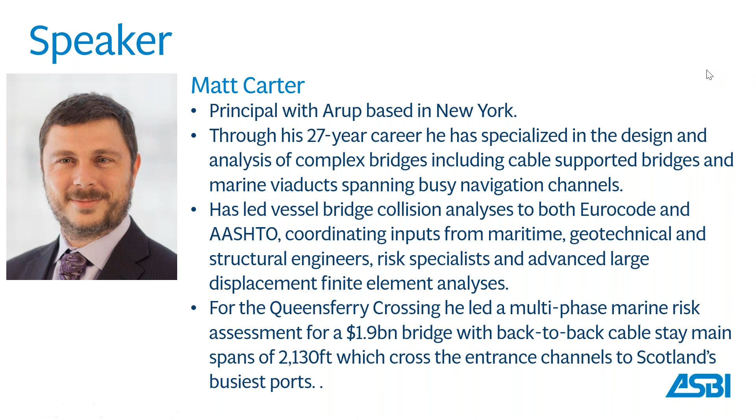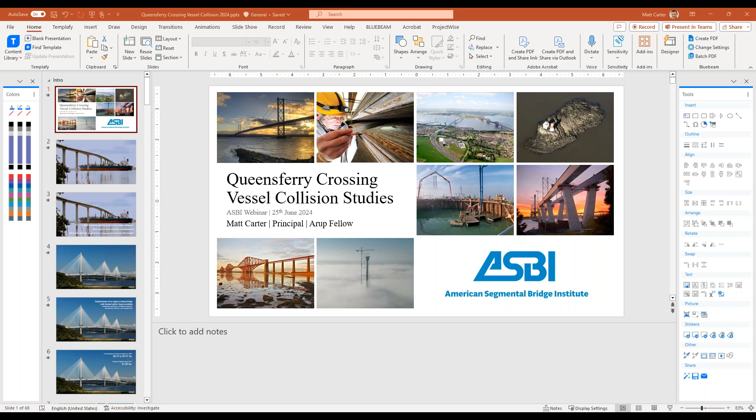Thanks, Greg. Let me just make sure I get it. Yeah, you just need to start the presentation. Great, there it is. All right, can you hear me? Yep, we can hear you just fine. So I will go on mute and turn it over to you.

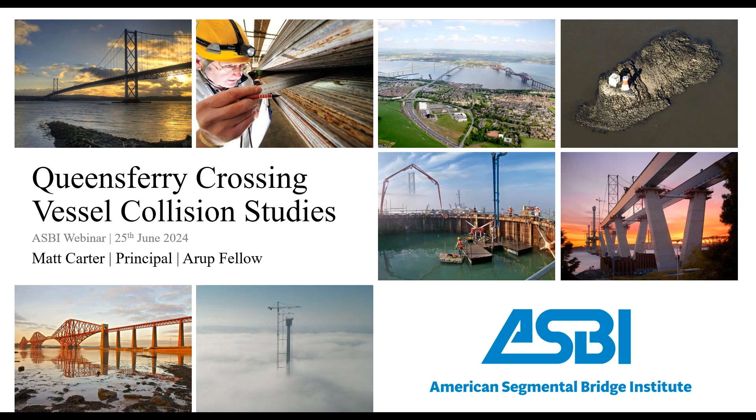All right, well look, thank you for that introduction, and thanks everyone for coming today. Many segmental bridges cross navigable waterways, so vessel collision risk, I think, is of interest to designers of segmental bridges, and especially at the moment where this risk is in the spotlight.

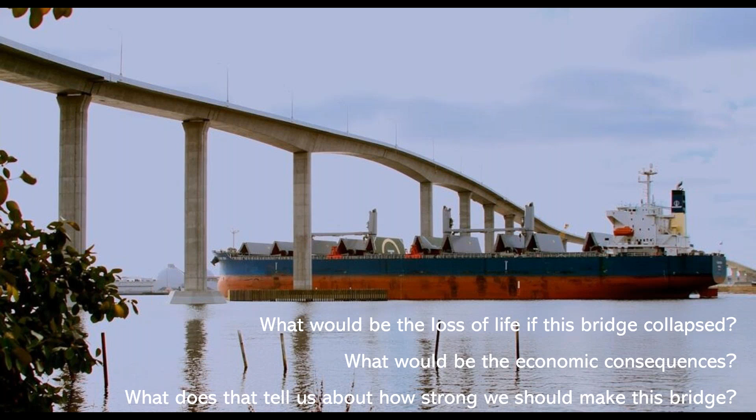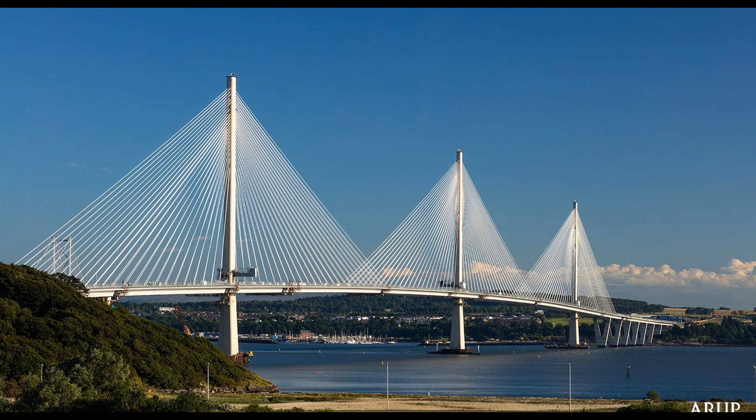If you're designing a bridge like this, there are some questions that you might reasonably ask yourself, like what would be the loss of life if this bridge collapsed? What would be the economic consequences? And what does that tell us about how strong we should make this bridge? These are all questions that we had to address in the design of the Queensferry Crossing.

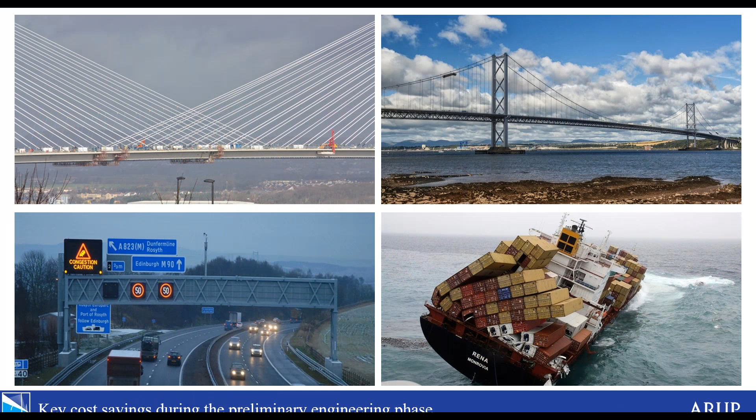It is an international case study, but it shares a lot in common with many major bridge projects in the United States. And it's an incredible value story as well. It's an award-winning structure which was delivered for about a third of the originally estimated cost, still achieving all of the client's strategic goals. A lot of the cost savings came from engineering during the preliminary engineering phase, good decisions that were made, and the client invested in giving the time and budget to allow these decisions to be investigated and made.

And there's four that I often think about. There's the unique crossing cables structural system. There was a managed crossing strategy that found a sustainable use of the existing road bridge. There was the use of intelligent mobility to make the roads work smarter and have less physical infrastructure. And then the topic of today, the marine risk assessment.

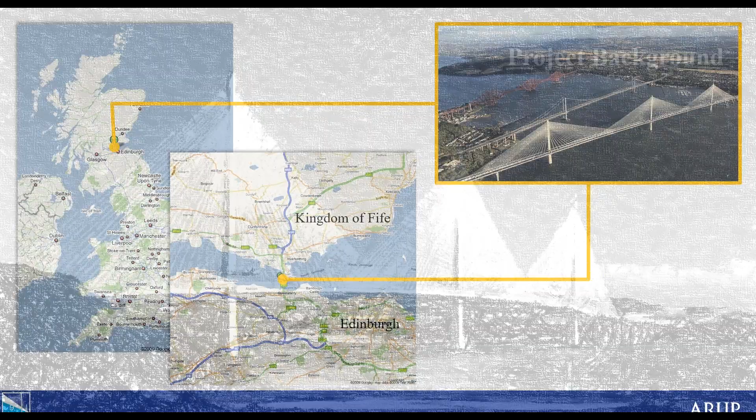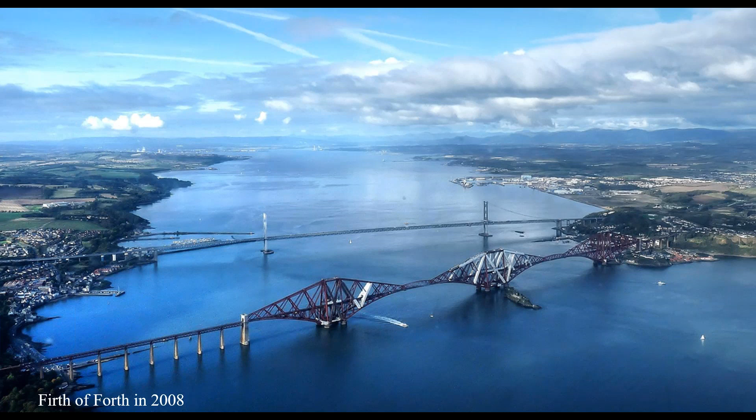Just a bit of background on the project. The Queensferry Crossing is in Scotland. It connects the capital of Scotland, Edinburgh, to the Kingdom of Fife, which is one of the main commuting districts. It crosses the Firth of Forth. The Firth is the Scottish word for estuary, and this is what the Firth of Forth looked like at the beginning of the project in 2008, with two historic bridges already crossing there.

There's the 19th century rail bridge, which is a very famous heritage structure, and then the 20th century road bridge opened in 1964.

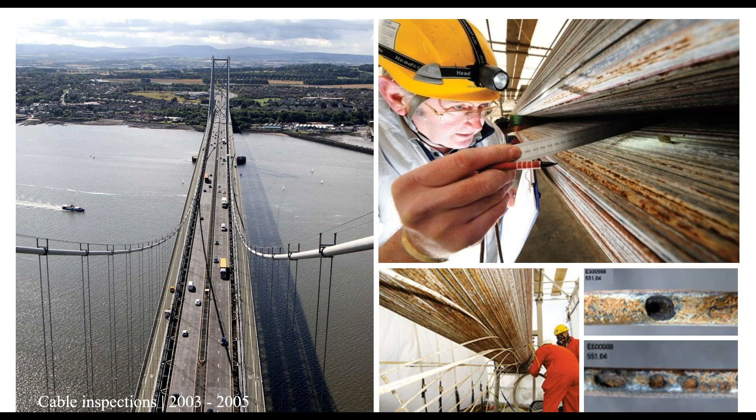It was Britain's first major suspension bridge, carrying 66,000 vehicles a day, more than double the traffic volume it was originally designed for. The story starts back in 2003 when the bridge master for the Forth Road Bridge, hearing about what was going on in the United States when cables were being unwrapped and inspected, took the decision to take a look inside the Forth Bridge cables and found a pretty bad picture: a lot of corrosion, a lot of wire breaks, and a prognosis that the bridge could not go on indefinitely, and something needed to be done.

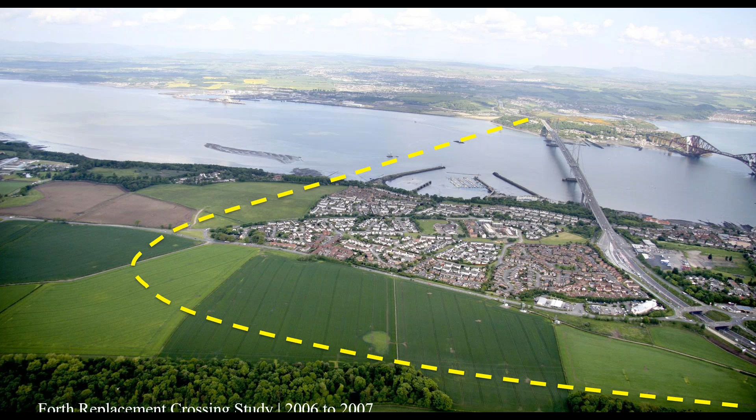This was combined with other maintenance issues related to the very high volumes of truck traffic on the bridge. That led to feasibility studies in 2006 and 2007, which looked at no-build options, tunnels, and bridges on a variety of alignments, eventually concluding there should be a replacement bridge on an alignment slightly to the west of the existing bridge. It's a very special alignment because it crosses right over Beamer Rock, a dolerite outcrop in the middle of the Firth of Forth.

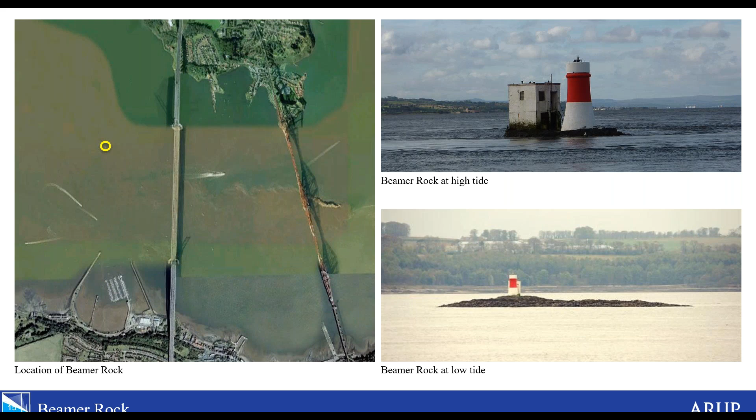It's a tiny little outcrop. You can barely see it at high tide. It reveals itself a little bit more at low tide. But that allowed the crossing to be made with a pair of back-to-back cable stay bridges.

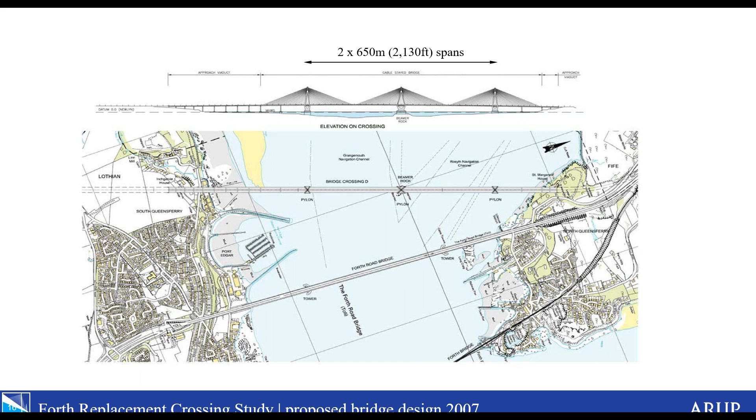This was the proposed design at the start of our studies, with triangulated towers to deal with the double main span issue of what happens if you have traffic on one span and the stability of the central tower. That was really where the crossing cables came into their own, as they allowed a flexible tower on Beamer Rock with a huge reduction in foundation size, which was good because the underwater blasting needed to create that platform for the central tower was a pretty significant undertaking.

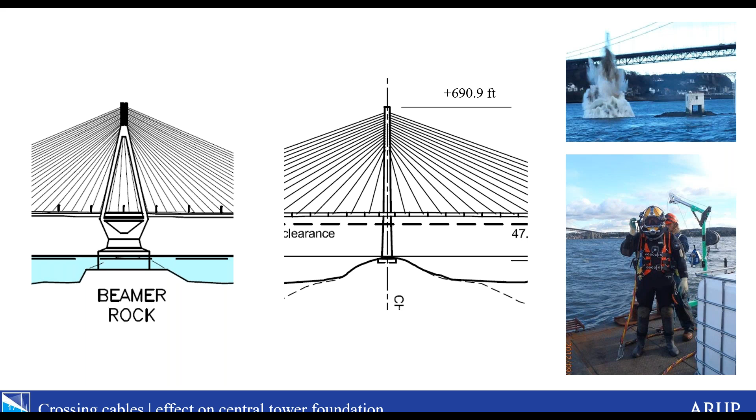It was a design build contract, awarded to a consortium, Forth Crossing Bridge Constructors, in April 2011 - you'll recognize a few of the names there, Dragados and American Bridge for sure. A contract duration of 66 months, with fixed lump sum payments based on milestone completion.

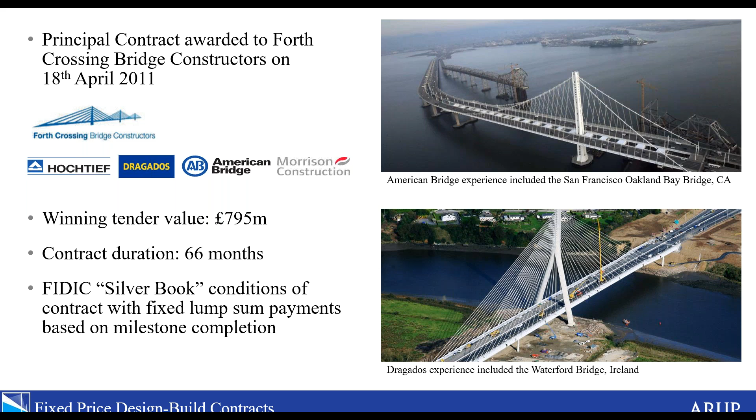So that's really the background and takes us to the marine risk assessment, which was something we did as owner's engineer prior to the award of the design build contracts.

This is a look down on the Firth of Forth, and you can see there were two navigation channels. The Forth Deepwater channel was the main channel to the container terminals upriver in Grangemouth and Crombie, with also container terminals and transshipment of North Sea oil, so that was a pretty significant shipping channel.

There was also a secondary channel that went to the port of Rosyth, primarily for ferries. One of the things you see as you look along the channels, in this inbound view going upstream towards the ports, is that the channels are heading straight towards the South Tower before they make the bend. That's pretty significant in terms of vessel aberrancies and the kind of risks the bridge might be exposed to because of that bend in the channel right before passing under the bridge.

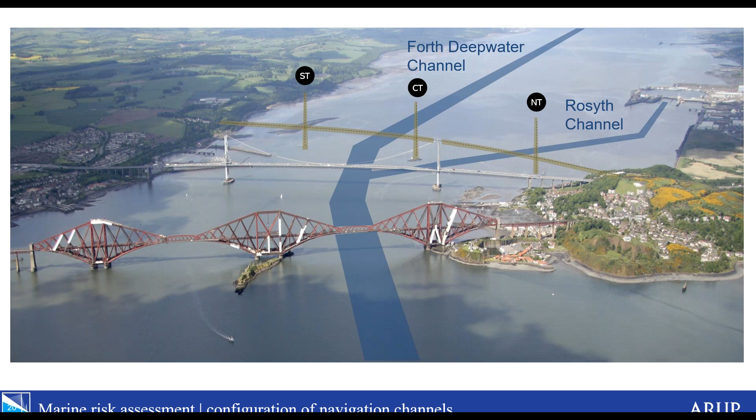We developed a vessel frequency distribution, surveyed without growth factors, showing the two different channels and the number of transits. This straight away gives a clue as to why a probabilistic study might be beneficial - some of the largest vessels were over 40,000 deadweight tons. Not the 100,000, 150,000, even 200,000 we sometimes have to deal with, but still pretty significant vessels with impact forces up to 56,000 kips, though very few transits of vessels at that size.

The bulk of the transits are more around the 15,000 to 20,000 displacement tons range. So probably with a risk assessment, we might be able to convince ourselves that we don't need to design for the very largest ships.

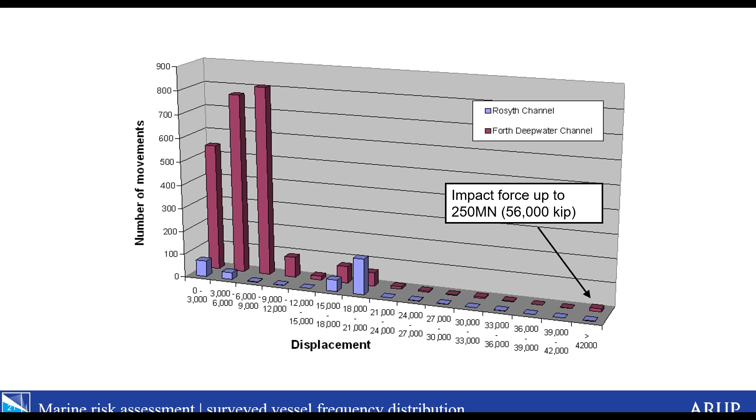So starting with the qualitative risk assessment, I think this is an important precursor before you get into a quantitative study. And what you can see is it's fairly broad-fronted. It looks at the marine hazard from a big picture perspective. It includes data gathering, stakeholder consultation, establishing the span and the air draft, and a number of different aspects. And this all creates the picture of what the marine risk is that we're looking at, and helps to make the quantitative risk assessment informed and focused on the right thing.

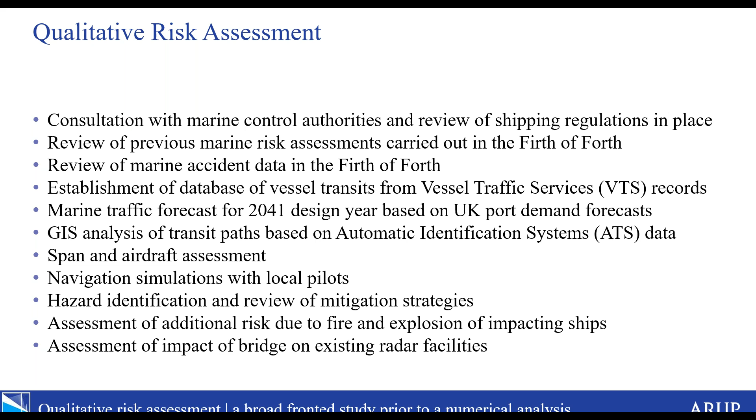The qualitative risk assessment isn't just looking at the risk to the bridge, not just how likely is the bridge to collapse, but also what does the bridge do for ships. We need to take care that the presence of the bridge won't increase the risk of ship-to-ship collisions, ship groundings, or damage to ships. Even though the bridge is strong enough, the ship sinks, and so it's still a marine hazard.

And then, of course, it looks at the risk to the bridge. The primary risk that is typically considered by codes is vessel transits under the bridge, but we also were considering maneuvering near the bridge or ships breaking free from adjacent anchorages. And for this study in particular, because a large amount of the shipping was oil tankers, we also looked at the risk of consequential fire and explosion after a collision between a vessel and the bridge.

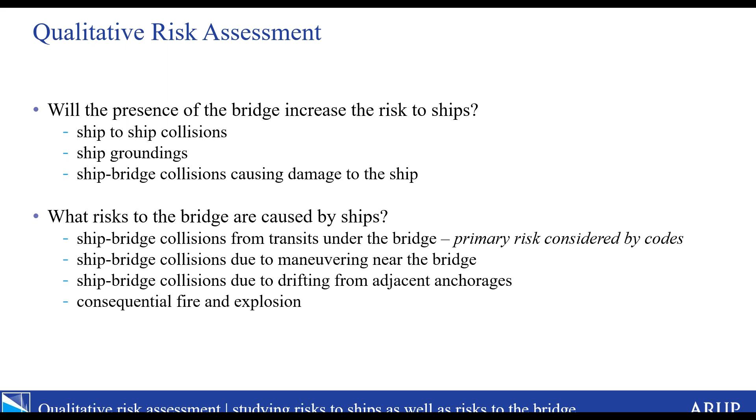I mentioned earlier the assessment by local pilots. This is always quite an interesting part of the study. We're all familiar with flight simulators for training aircraft pilots. There are also full mission bridge simulators for training vessel pilots, and that can include putting in changes to the navigation situation, including, for example, the bridge. We got a very favorable outcome from the navigation simulations with the pilots.

One thing we did get is we took a lesson learned from a bridge we worked on in South Korea, where we'd been the independent checker of the marine risk assessment. That bridge originally had a span of 700 meters, so like 2,200 feet or so. It also had these kind of simulations, but what they did with the pilots is put everything on them on day one — terrible weather conditions, nighttime, a power failure on the ship, everything thrown at them from the very beginning. And the pilots came out sweating. As a result, the span of the bridge was increased from 700 meters to 800 meters. So learn from other people's mistakes.

We said, well, for this one, let's work with the pilots to train them in good conditions with the bridge in place. Then when there's a complex scenario they have to navigate, they're more prepared. And also, I think there's a better understanding that the stress and the workload is related to the situation they're dealing with, and not necessarily the presence of the bridge itself.

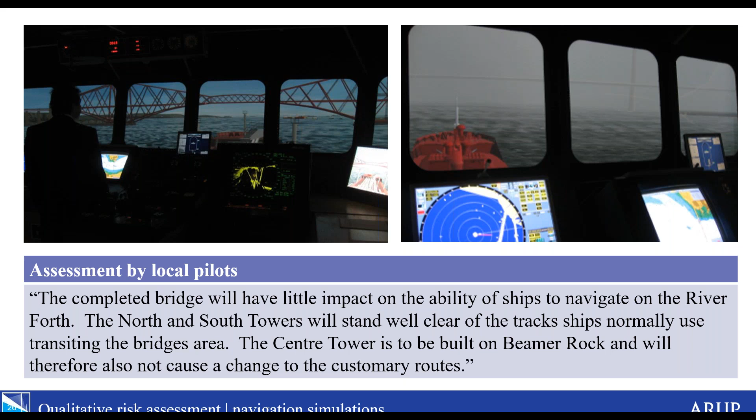So moving on to the human consequences of failure and the development of risk acceptance criteria. This isn't codified in the UK, so we had to develop these criteria specific for this project. We looked at both individual risk and societal risk, with individual risk being: if the bridge was to collapse, what is the likelihood that any given individual might be killed in that accident?

And there's two concepts: voluntary risk and involuntary risk. If you get in your car and drive to work, you have a reasonable sense that you're taking your life into your own hands, and you know that you can only control some of the hazards you're exposed to on the highway. Someone could cut you up, or you could be involved in an accident that's not your fault, and worst case, that could be fatal. But I think you have an ability to perceive and understand that risk.

The concept with involuntary risk is that people can't be expected to understand that crossing a major bridge could increase their risk, because that bridge might be hit by a ship and collapse. So one of the things to do is quantify that involuntary risk and make sure it doesn't significantly change the risk profile of an individual commuting across the bridge every day.

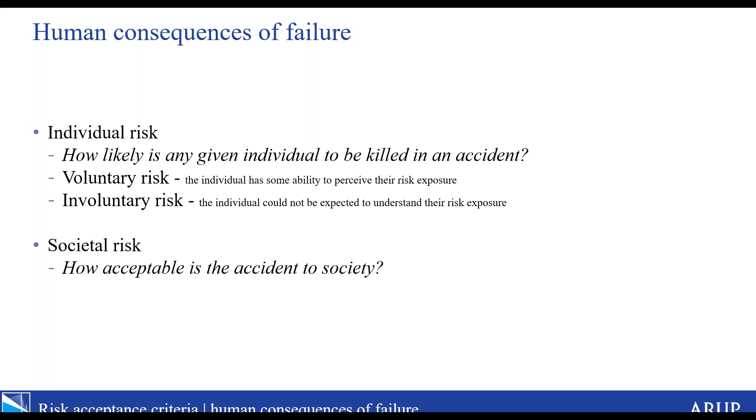But a deeper question is, how acceptable is the accident to society? I'll go into that a bit. This starts to speak to what's the acceptable return period.

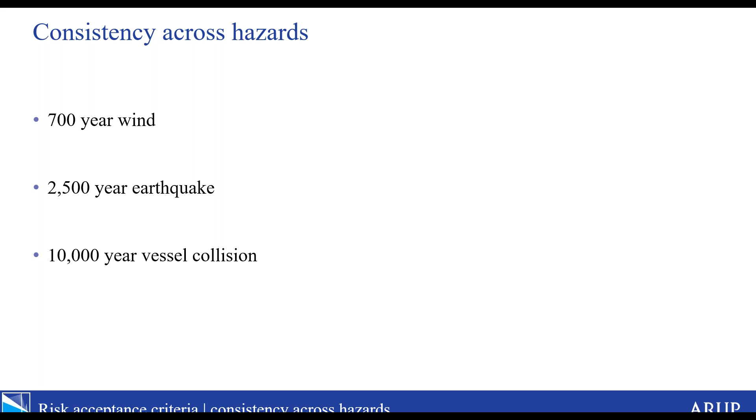As bridge engineers, we look at quite different return periods for different hazards, and it's important to understand these are not looking at the same thing. For wind design, it's load and resistance factor design calibrated to a target level of reliability. For earthquake engineering, we expect the bridge not to collapse and to meet certain performance criteria in that event. The 10,000-year vessel collision has a much higher return period, but that's actually the predicted failure return period. There's a big difference between predicting the failure return period and designing for a bridge not to collapse under a certain return period with certain performance criteria.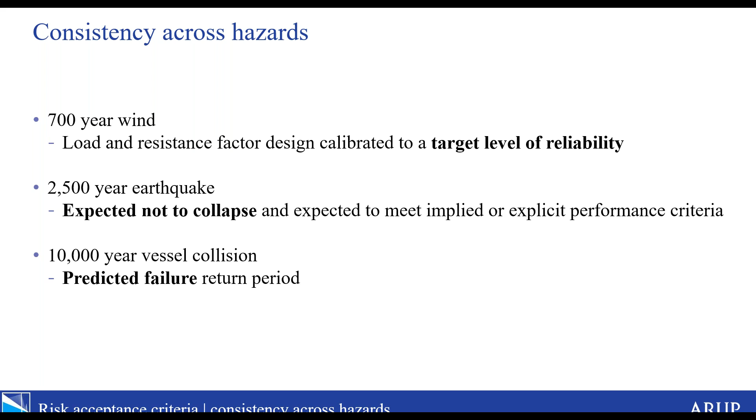AASHTO has pretty set return periods for the failure frequency for vessel collision, and the Eurocode, which was the governing code in the United Kingdom at that time, though relatively recently so — this was one of the first cable stay, probably the first major cable stay bridge designed in the UK to the Eurocode.

It wasn't codified. There was some vague guidance on maximum acceptable risk levels, and some correlation between AASHTO and Eurocode — if you go above medium consequences, you're at a higher return period. But it does explicitly refer to as low as reasonably practical principles for determining whether to provide risk mitigations.

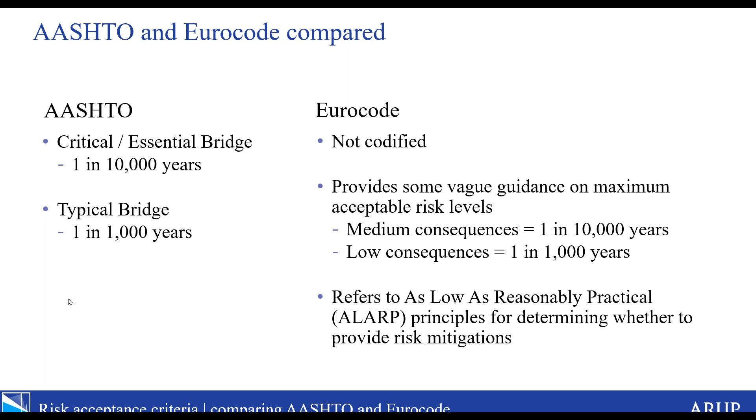The way ALARP, as low as reasonably practical, works is that you assess the number of fatalities that could occur in an incident and the frequency of that incident, then look at whether it's acceptable or not. Incidents with a low number of fatalities and a very low probability of occurring are considered negligible, and incidents which are probable with a large number of fatalities would be intolerable.

In the middle between those regions is the as low as reasonably practical region, where you can design within those limits, and you should reduce the risk if it makes sense from a practical perspective. Once you get into the negligible risk zone, you're kind of done.

One task was estimating the number of fatalities in the event of a collapse. Given the nature of the Queensferry Crossing, if one of the main substructure units got taken out, a very long length of bridge would collapse. Looking at traffic patterns, we estimated 330 fatalities for a daytime collapse, and 20 fatalities on average for a nighttime collapse. There was no real correlation between shipping movements and time of day, so we worked with an average of 175 fatalities as the scale of the event we might be thinking about — pretty significant.

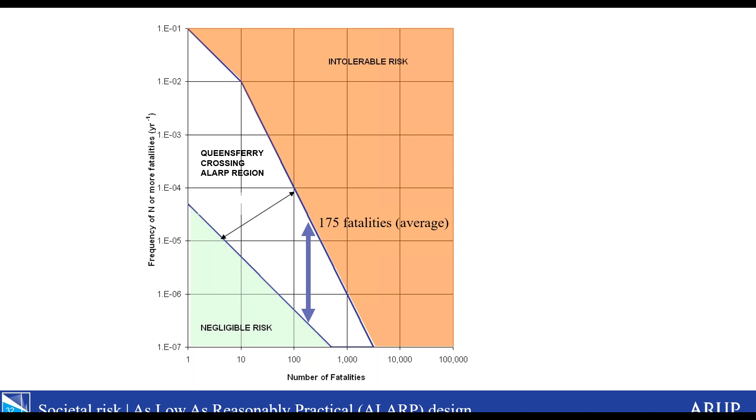One challenge was that although Eurocode pointed to this concept of ALARP design, we had to develop the boundaries ourselves. A lot of the original work on this kind of ALARP design took place in the UK in connection with the Canvey Island public inquiry in the 1970s.

This was an area in the Thames estuary in southern England with a significant concentration of petrochemical plants. A public inquiry was held to determine if planning permission should be granted to a new refinery, and the investigations established this concept and risk levels, resulting in proposed societal risk curves for an identifiable community in the UK.

Those red dotted lines are published, but they were never adopted, and you can see they don't exactly correlate to what we adopted for Queensferry Crossing. The boundary with the negligible risk level is quite close, and we found a construction industry research report we could cite, which had a lower level boundary very similar to the Canvey Island public inquiry proposal.

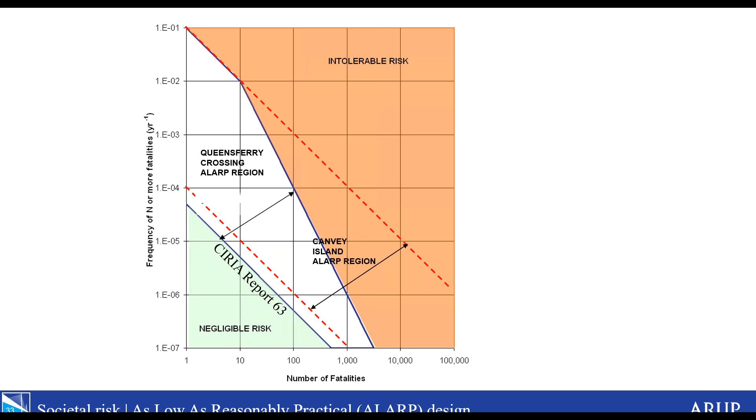But for the upper boundary with the intolerable risk, we did not follow Canvey Island. This was in part looking at some of the work that was done on Orwell Bridge.

And with these kind of curves, they typically have either a slope of -1 or a slope of -2 on a log-log scale. -1 is risk neutral.

If you look at the dots there with 10 fatalities and 100 fatalities, and with 10 to the -2 or 10 to the -3, what you see is that a risk neutral curve implies that one accident with 100 fatalities is the same as 10 accidents with 10 fatalities each. A risk averse curve is one accident with 100 fatalities is 10 times worse than 10 accidents with 10 fatalities each. So even though it's the same number of fatalities, it's 10 times worse from a societal perspective.

It was obvious to us and to our client when we were doing these studies that even if Britain had been a risk neutral country in the 1970s, by 2010 it was very much risk averse, and major accidents of the kind of scale we were talking about have very significant social and political fallout.

So we ended up adopting what we show there as the Queensferry Crossing ALARP region with a slope of -2, intersecting with Canvey Island at 10 fatalities, which we felt was the boundary when things started to get of a national scale. One thing you see from that is a narrowing of the ALARP region. So as the consequences of the accident get more severe, the design boundary that you can move away from negligible risk gets narrower.

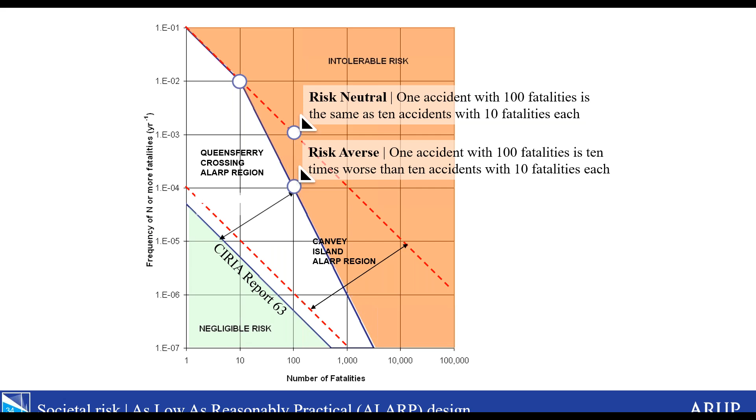So working within this ALARP model, we need to find a design point within that middle region. We did develop an economic model for looking at risk acceptance criteria, based on 3 key relationships, and each one of these relationships makes perfect sense.

Looking at risk against capacity, if you increase the capacity of your bridge elements, you will lower the risk of collapse, and the marine collision risk assessment is the tool you can use to correlate between risk and capacity. Equally, if you increase the capacity of your bridge elements, you're going to increase the capital cost, and you can do schematic design and estimate different scenarios to develop that relationship.

And finally, there's this statistical cost against risk, which is quantifying the consequences of failure and carrying out an economic assessment to figure out the expected present value of those consequences. I'll go into that phrase in a minute, but this leads to a statistical cost. Essentially, the more risk that you allow on the project, the higher likelihood that there might be some cost you have to deal with in the future.

And looking at that statistically, there's a correlation. You can put those 3 relationships together to develop a total economic cost, which is adding the capital cost and the statistical cost, to find an economic optimum where this risk level will in theory be the perfect balance between capital cost and the statistical costs you're carrying into the future.

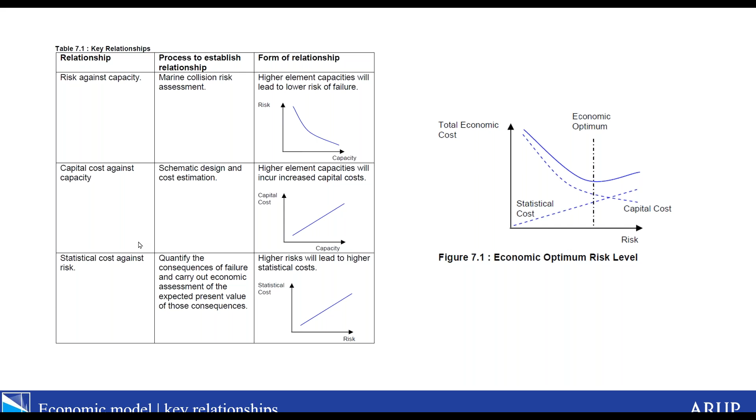And that is in fact exactly what we found on Queensferry Crossing, was that the actual design point tended to push a little bit to the left.

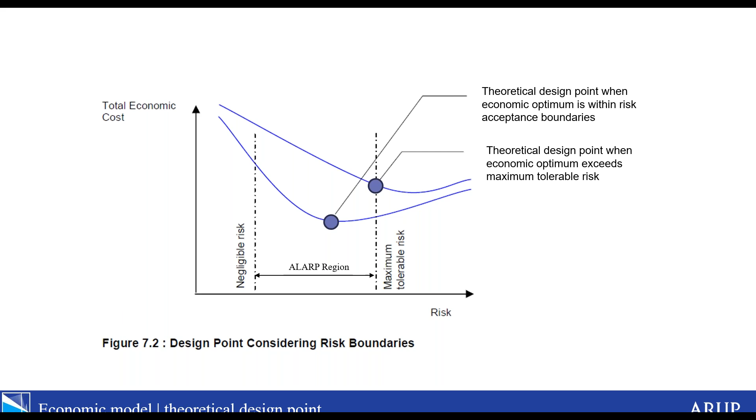So we did have to evaluate the consequences of collapse. And, as I already mentioned, on average, 175 fatalities.

We estimated direct reconstruction costs. Obviously that cost is not what we saw on the capital cost for the whole project, because there were other elements, and all of the costs here don't include certain risk factors and additional contingencies. But anyway, direct reconstruction costs of approximately £500 million, and then an economic cost of the bridge not being available for about 5 years. We had economic studies that were done to justify the replacement project in the first place, and we estimated that at approximately £1 billion.

Now, there is guidance in the UK about the value of preventing fatalities, and so we were able to put a price on that. It's sometimes an uncomfortable concept, what is the price of a human life? But fortunately there was government guidance here, and it is something necessary because there are limited public funds available.

You could either spend your money on making a bridge stronger, or you could spend it on building or improving hospitals, or a highways agency or Department of Transport could spend that money, instead of improving the capacity of a big bridge crossing a navigation channel, on dozens of road safety improvements across the state. So you have to decide where best to spend your money.

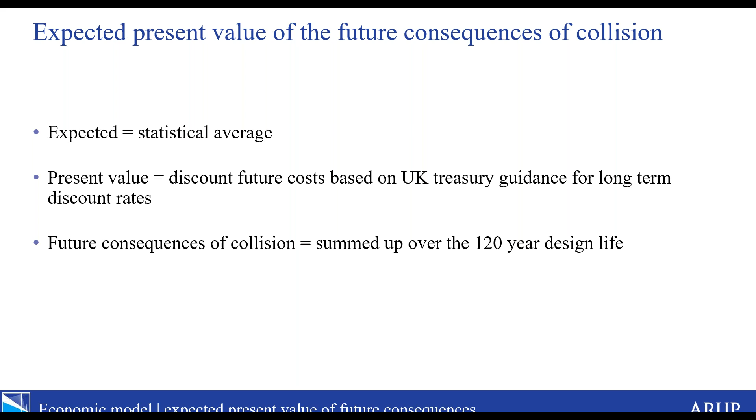So I said I'd come back to the expected present value of the future consequences of collision, which is a mouthful, but expected means the statistical average. The present value, most of us will be familiar with future discounting of costs, and there was UK Treasury guidance for long-term discount rates on projects, with future consequences of collision summed up over the entire 120-year design life of the bridge.

And we can see how that discounting occurs from 1.8 billion estimated consequences of collapse, but discounting over time, averaged over the 120-year design life, 825 million pounds.

Now, one of the things is the concept of the value of a prevented fatality, something we should be able to wrap our heads around. I must admit, when I was doing these studies, I was the father of a newborn baby, and it was a little bit harder for me to wrap my head around the concept of discounting future prevented fatalities.

But fortunately, number one, there was UK government guidance that told you exactly the discount rate to use, and it was a very low discount rate. And number two, it had no influence on the overall decision making.

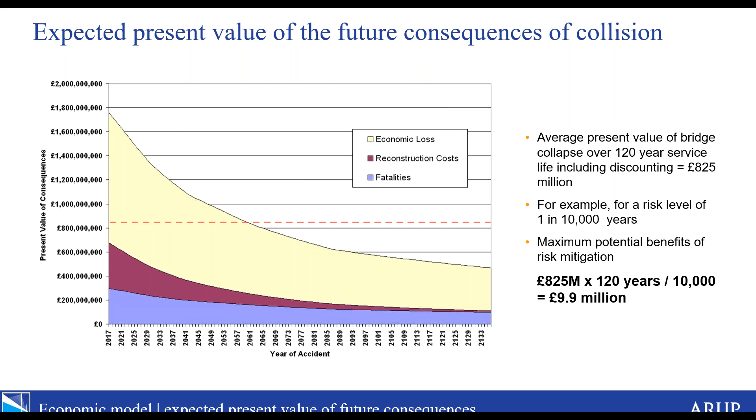One of the things you can see is, supposing we had a 1 in 10,000 year collapse frequency, like an AASHTO critical or essential bridge, what does that mean if we take 825 million times 120 years divided by 10,000? Just about 10 million pounds. So the statistical cost you're carrying is not very large compared to potential capital costs of strengthening the bridge.

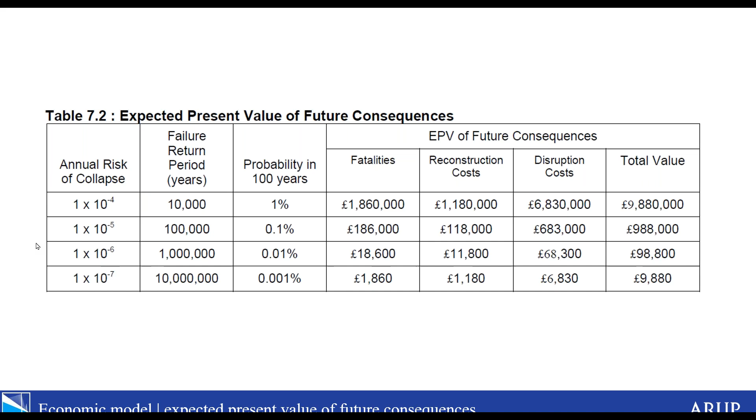And you can see that as you move to ever reducing frequencies of collapse, that cost diminishes each time. We could put this data together, and we did, exactly to develop those relationships that I showed earlier on. Before they were shown theoretically, here we developed them for the project.

And for the most exposed elements, we did tend to find that an economic analysis was pushing us towards the right-hand boundary of being close to the maximum tolerable risk. And for some of the less exposed elements, we were more inside the ALARP region.

Another consideration which influenced decision making was the environmental impacts associated with higher capacity. So you won't see vessel collision dolphins on this bridge, but we did think about it, and the costs and environmental impacts weren't justified. The bridge is significantly strengthened in some key areas so that the foundation units themselves are strong enough to resist vessel collision up to a point.

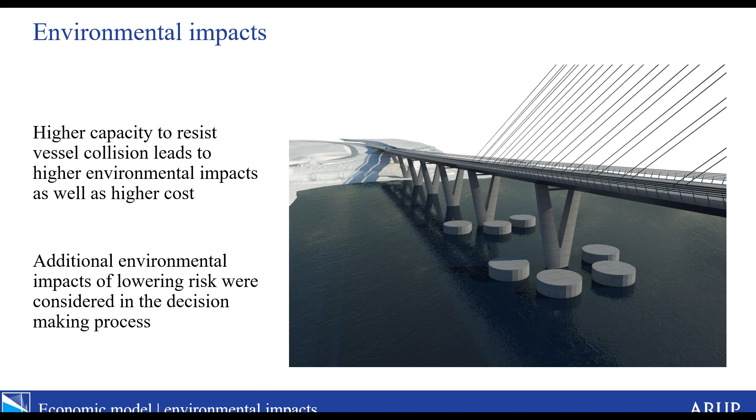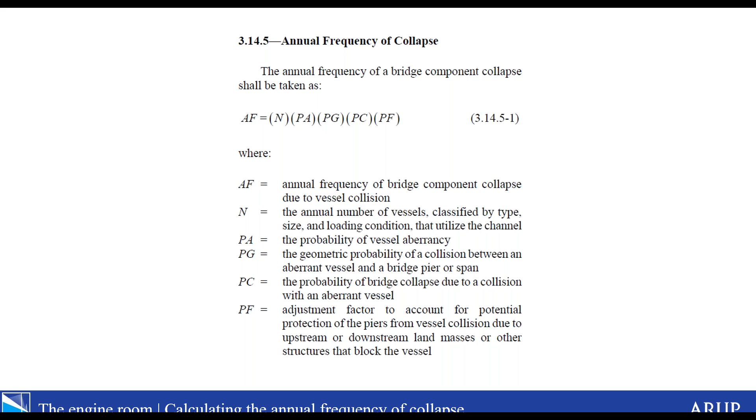Which takes us to the engine room, the numerical calculation, and this is the thing closest to an AASHTO calculation, but with some differences within the UK and Eurocode system. We did use a GIS analysis based on data from automatic identification systems trackers on ships to develop vessel transit paths and speeds. And we can see the probability of collision with different elements.

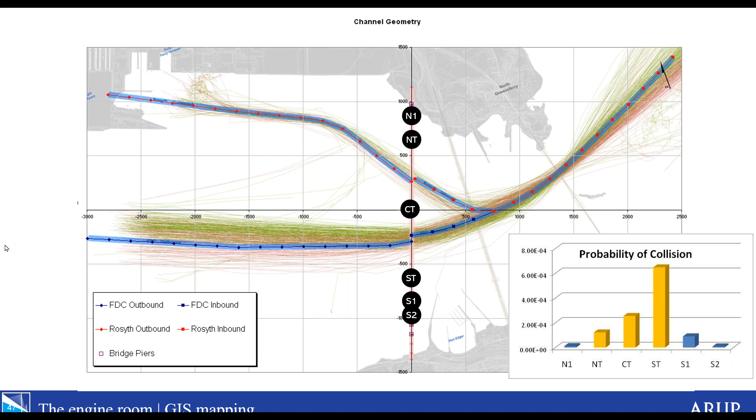Just like we saw from that helicopter view earlier on, the South Tower is very exposed to collision in particular, and of the piers, pier S1 is the most exposed of all the piers. Although it's a lot less exposed than the towers, of course the towers in a cable stayed bridge will naturally have a lot of strength just to resist the vertical loads, whereas the piers maybe less so.

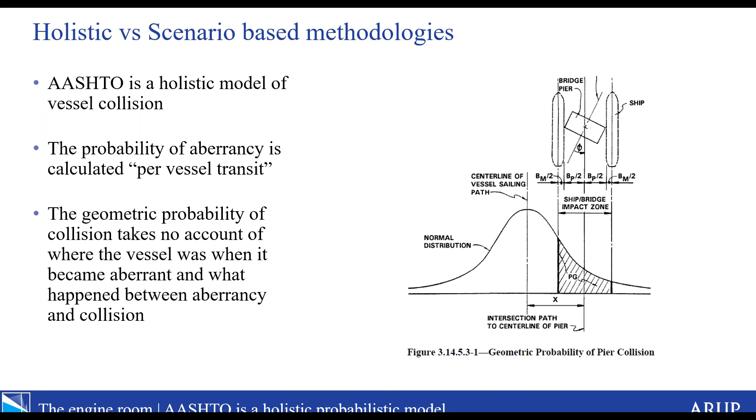AASHTO is a holistic model of vessel collision. It calculates the aberrancy per vessel transit, basically saying 1 in every 17,000 transits there's going to be a ship that's gone wrong crossing the center line of the bridge. And we use a standard deviation bell curve for where that ship might be.

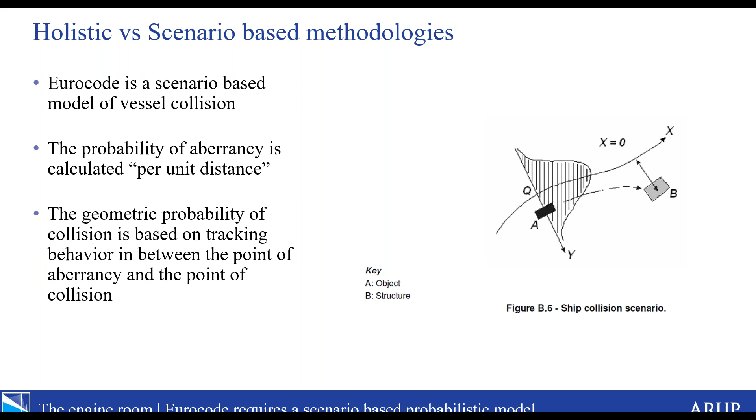Eurocode, on the other hand, is scenario based. Rather than saying there's a certain aberrancy rate, like 1 in 17,000 times a ship passes the bridge, it does a per unit distance aberrancy. So the geometric probability has to track the behavior between the point of aberrancy and the point of collision. Eurocode is clear that it's different to AASHTO, but it doesn't give you any of the parameters needed to actually do the analysis, and it doesn't provide references either. So you have to go and figure all that out for yourself.

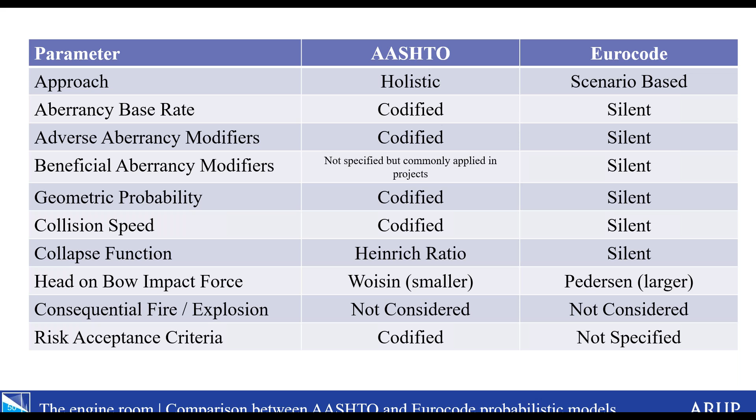Not ideal. Now AASHTO is completely on the other end of the spectrum, where every parameter is given, so you can do a full probabilistic risk assessment really just straight out of the code. That's very convenient sometimes, but potentially it can lead to certain things being missed. So I think neither extreme is necessarily ideal, but Eurocode certainly makes for hard work to carry out that study, though it's very clear it should be scenario based.

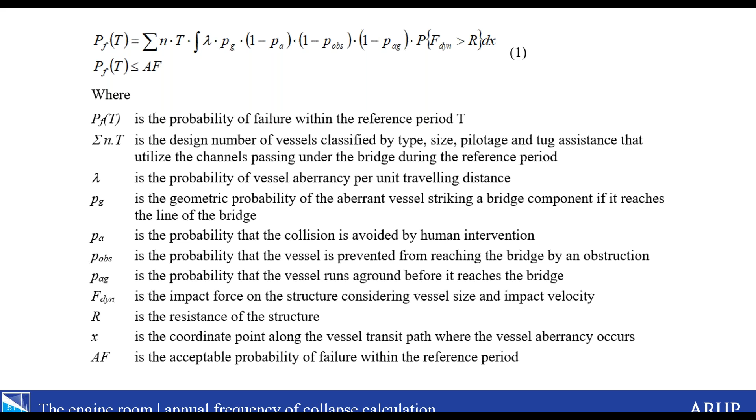So we developed a model that looks quite similar to the AASHTO model in terms of its number of different conditional probabilities, based on the Eurocode, and developed a model of post-aberrancy behavior that basically said at the time of aberrancy, the vessel will be on its transit path with some deviation of position, and afterwards it will on average head in the same direction. The further it gets from the point of aberrancy, the more broadly it may have spread, the more uncertainty in the position.

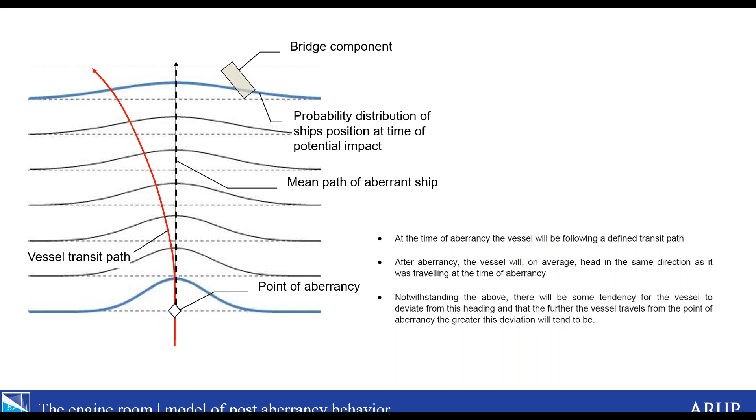We looked at various research documents and studies to develop base rates of aberrancy, and you can see there are frequencies per ship hour of propulsion failure, steering failure, human error. There is data out there that says these kinds of failures on a ship do happen, with a degree of regularity that is predictable on a statistical basis.

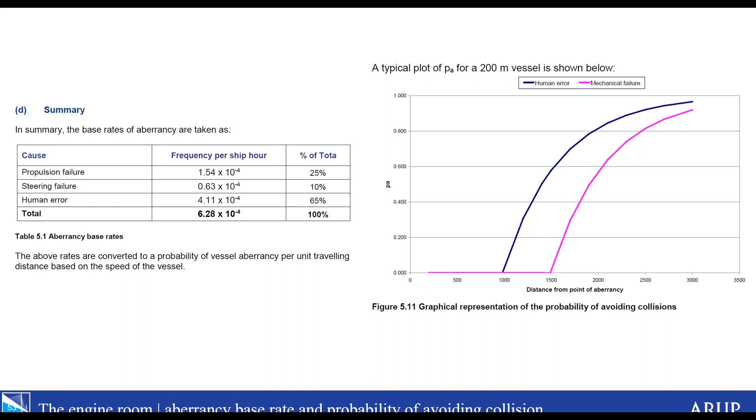Another important part of the Eurocode approach: if you look at the aberrancy at a point, then what about the probability of avoiding collision? So based on discussions with local pilots and mariners, we developed models of the ability of a vessel to recover.

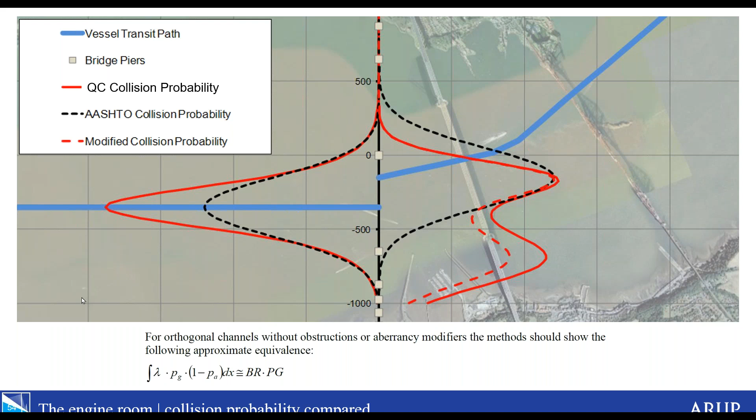We also had to develop a probability of collapse function. In AASHTO there's a Heinrich ratio, which is basically: if the impact force is 10 times higher than the resistance, then the probability of collapse is 10%, which you have to read a few times to wrap your head around. But it's basically based on the premise that not all accidents are as bad as they might have been, and it's based on research on ship-to-ship collisions carried out in Japan, I think in the 70s.

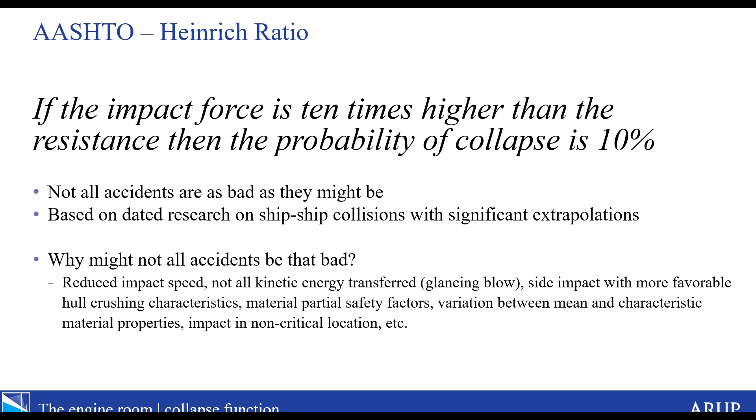There are a lot of reasons why accidents might not be as bad as you thought it was going to be—a chance to slow down, maybe a glancing blow, a drifting ship, partial safety factors, lots and lots of reasons. We developed a project-specific collapse function looking at the resistance of the elements and thinking about their variability, then with two different impact forces, one for the frontal and one for the hull, saying well, 80% of collisions are probably not going to be a frontal impact. Putting those two curves together, we could develop a probability of collapse.

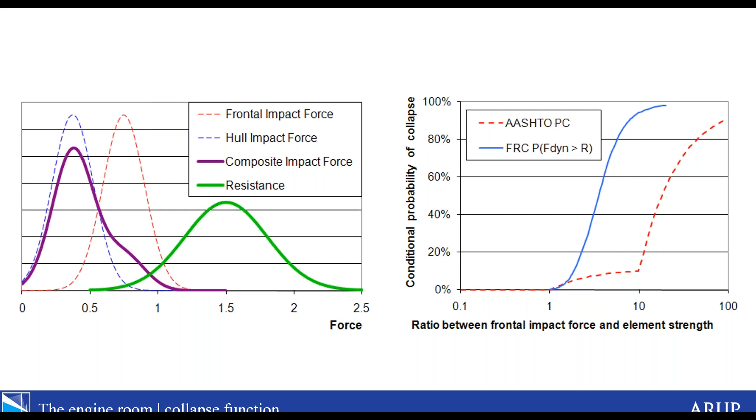But it's hard to justify the AASHTO probability of collapse function if you take an approach of developing your own, so we used that more conservative approach. We used the blue curve, which still has probability of collapse in that if the impact force is significantly higher than the resistance—that's the nominal impact force and the nominal resistance—there's still only a probability of collapse. But by the time you get to the impact force being 10 times the element strength on the Queensferry Crossing curve, you are getting close to a 95% chance of collapse.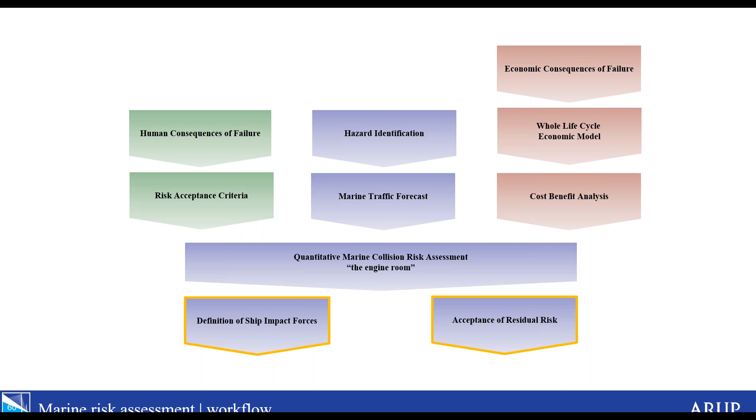And they were quite comfortable with making these kind of decisions for acceptance of risk at a more regular scale, where you say, like, should we invest this much money in an intersection improvement scheme? Slightly more challenging to ask them to make decisions on very, very, very small probabilities of very high consequence events.

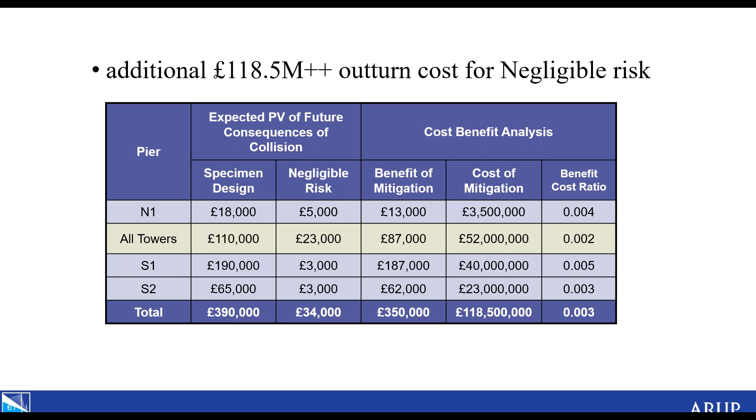But anyway, this was information that we took to them, and we were able to compare the design that we had at that time, the so-called specimen design, with strengthening the bridge to get to a negligible risk level. It would have cost another 120 million pounds or so to get to a negligible risk level, but with the benefit only being like 0.3% of the cost. So really not worth getting to that level, and better to take that acceptance of residual risk.

But what we did find is S1 really became quite an interesting case. To resist the service loads, it needed a capacity of 6,700 kips. Eventually, in the design build contract, we required a capacity that was 2.5 times that, which had an estimated cost of about 15 million pounds in additional capital costs.

But the benefit was only about 1.4 million pounds. So it really, on a straight cost benefit analysis, did not stack up. But the decision by the financial advisory group was really motivated by trying to avoid that Pier S1 was an outlier. So when they see the top chart there, and then they see that pier having so much more risk than all of the others, they actually asked us to develop what they called an equivalent risk design as well, doing enough strengthening so that pier is in line with the other substructure elements.

And so I think that really comes back to as low as reasonably practical. The word practical is important. It doesn't mean designing to that theoretical bottom point of a benefit to cost ratio of 1. It means designing in a way that makes sense based on having the information about the costs and benefits of different scenarios.

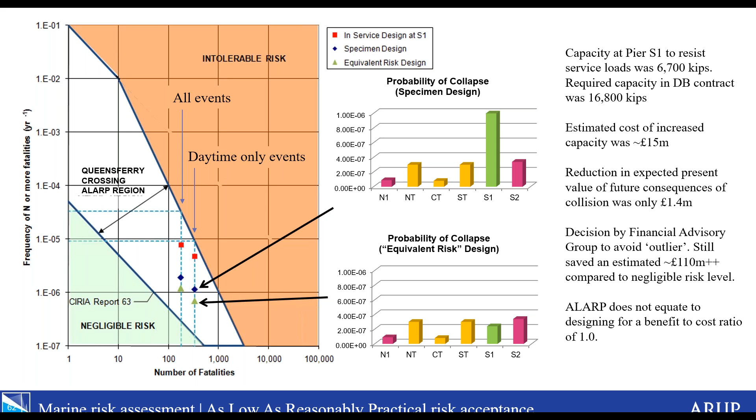And this was what went into the contract. We had the resistances for the different substructure units. We had a 2-level design where there was a repairable damage level with some lower level impact forces, and that was what the design builder then designed the bridge for.

So conclusions on this are, there's a lot of engineering judgment that goes into these kind of studies. Even if you're working with AASHTO, where a lot more of the parameters are codified, there's still a lot of engineering judgment, because for a bridge of this complexity, if it was designed in the United States, you wouldn't want to pick up AASHTO and just use it without going through that qualitative risk assessment first to make sure you'd identified all of the hazards. Some of the risk acceptance side might be a little bit more dealt with already, but there would still be a lot of judgment. And some of this is in a gray area. You can tell when things are okay, you can tell when things are not okay, but within that gray area of judgment, you really want that to be a discussion with the owner.

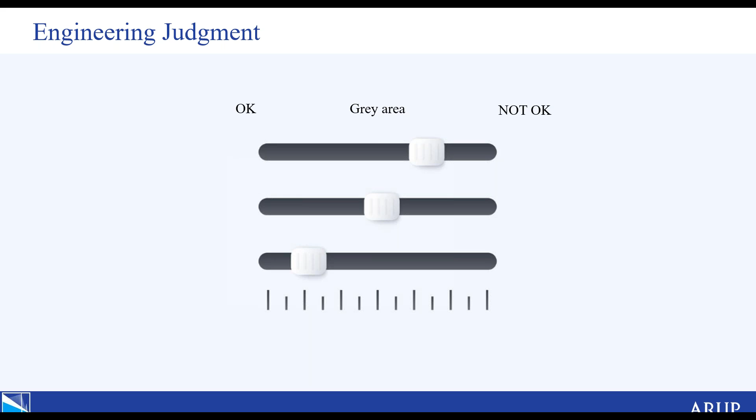And so that brings itself to, what does this mean in design build? This risk assessment took 18 months because it was done over multiple phases. And with that engineering judgment for these non-codified aspects and the need for approval from the Project Financial Advisory Group, it didn't make sense to ask the design builder to repeat the risk assessment. To some extent, it creates a conflict of interest unless all of the parameters are tightly specified, because on a fixed price design build contract, there's always the motivation to take those parameters in the middle and dial them towards the end of reduced cost. And it's also extra design effort. Why ask the design builders to repeat such a comprehensive study?

So in this case, the owner retained liability for the risk assessment and specified the forces. And because of that, we carried out an independent check so that that aspect of the design, which the owner retained liability for, was checked. Now, progressive design build somewhat changes this paradigm because you can work collaboratively with the owner. And so that removes that conflict of interest as you work collaboratively together to develop a GMP, and the decision making can be made jointly.

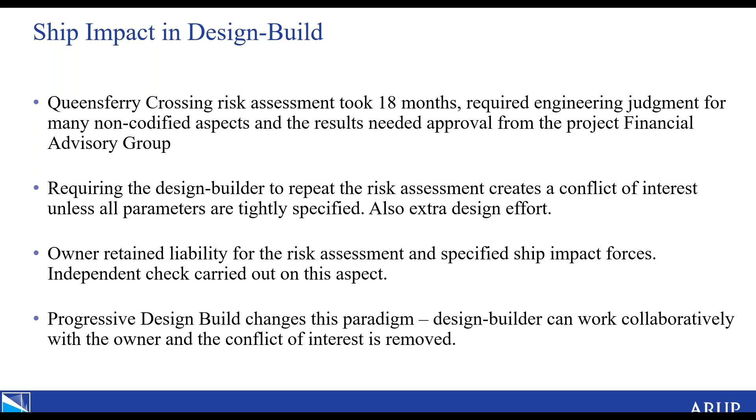And some of what we've maybe taken away thinking about AASHTO-based analyses - these are just observations, not recommendations - but the first principles approach is more time-consuming, but it does mean that you end up being more tailored to the specifics of the project. So for some bridges, this scenario-based approach will be more important, more appropriate, particularly if you're analyzing complex waterways. And the 1 in 10,000 year collapse frequency, does that cover all of the bridges? Is the United States a risk neutral or a risk averse country?

All right, well, thank you. That was a rattle through of a lot of work in a brief period of time, and yeah, very happy to take questions. Wade, did you want me to stop sharing or?

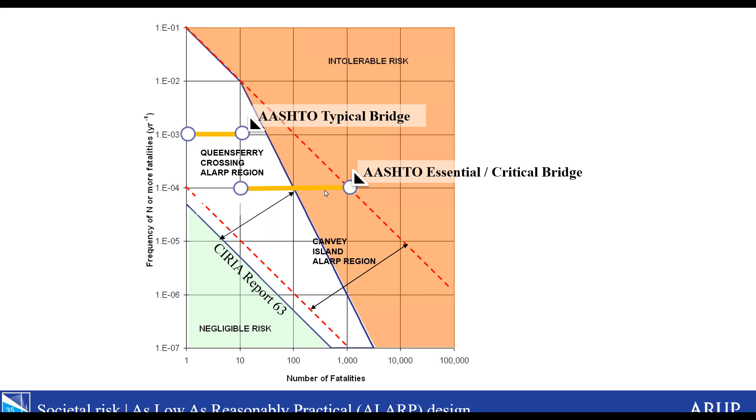Interesting. Yeah, it is interesting - there was that level of disparity between the results you guys had with the Eurocode and what AASHTO would have given you. Definitely food for thought.

One more question - we didn't really talk much about vertical clearance, but was the vertical profile of the bridge and the vertical clearance a determining part of this vessel collision study?

It was. We did have to do a span and air draft assessment. The vertical clearance was relatively straightforward because of the two adjacent bridges, and there was consideration of whether the bridge should be raised to provide for potential future expansion if the other two bridges are replaced. But the other two bridges are grade 1 listed structures - it's kind of like planning for the replacement of the Brooklyn Bridge.

You don't get very far because people say, well, that's never going to be replaced. So yeah, the Forth Bridge, by and large, isn't going anywhere. But the span was very much set by those navigation simulations I spoke about earlier, to make sure the piers - the towers - were set back far enough.

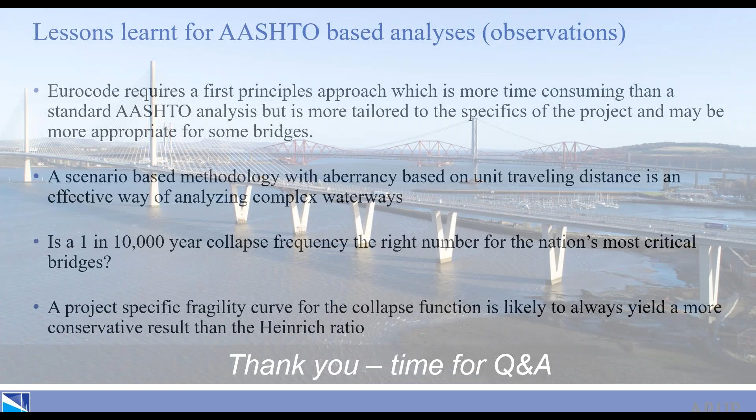I might have caught Greg off guard there. Yeah, seems like it. Yeah, all right. Well, maybe Greg's microphone isn't working. Nope, we can't hear you, Greg. All right, that's fine, I'll conclude today's festivities.